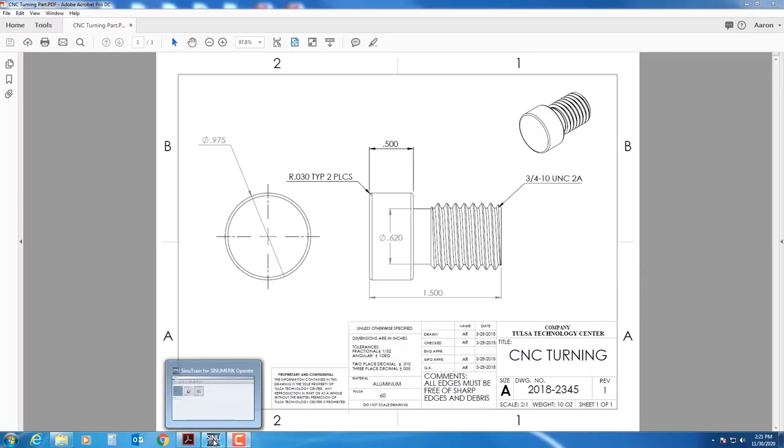So what I'm going to do is come down to my Sinutrain, which would be on your desktop once it's loaded. I will open this up. When you first open up this software, you might not have these two templates. If you do not, we will get those loaded on there for you. However, once we get to this point, we have our Tulsa Tech Fryer lathe.

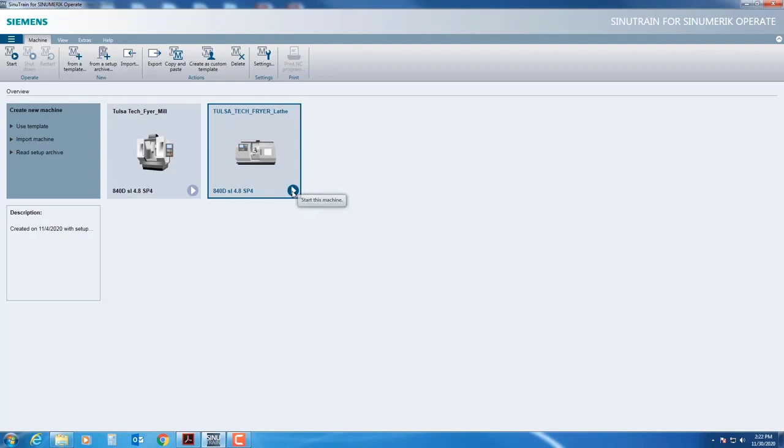We will hit the start button, and what this will do is activate that machine's simulator. Now this will power up a lot faster than it does on the machine. The first thing we're going to do, once this has come up, is get my program that I have written for that part into the machine.

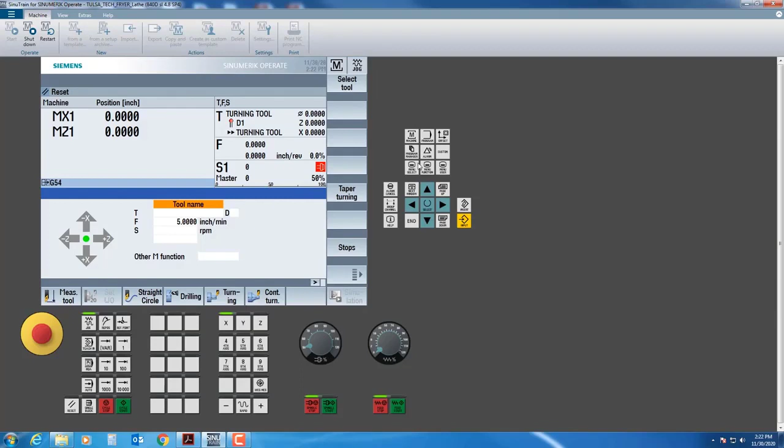So what I'm going to do is come over here to the Program Manager. If you'll notice, I have 3 sub-windows, and I'm going to put my program in the work pieces. But before I do that, I'm going to create a new folder just for my parts. So I will select New, and I'll simply type Fryer Test Programs, and then hit OK.

And after that, I'm going to hit Cancel because I don't want to create a new program. I already have a program. So I will hit Cancel.

Then what I will do is, with this highlighted, I'm going to come down to my USB. Now before I click on my USB, I need to have the program that I'm going to simulate on that USB and plugged into my computer. So I have already done that.

I will click on USB, and you'll notice this name is kind of long, so it's going to throw up an error saying that it's too long. However, I will come over here and make sure I can see the copy tab right here, make sure it's highlighted, and hit copy. I will come back over here to NC, make sure my folder is still highlighted, and I will hit paste.

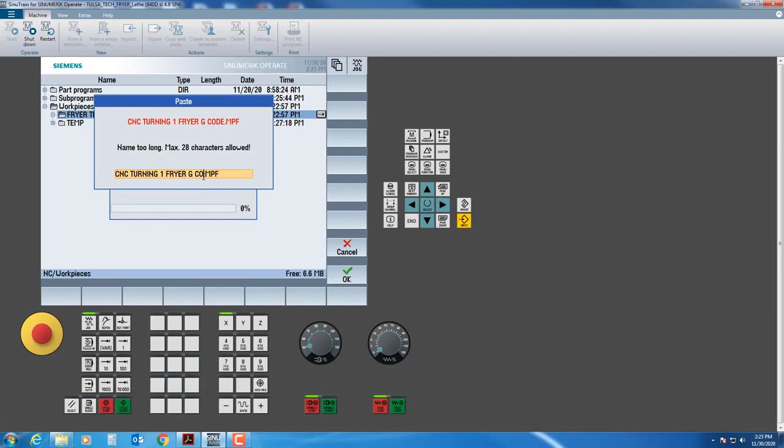Now it will give me an error, but it will allow me to change it. It just left off the D and the E, and I'm perfectly fine with that. So I'm just going to hit OK, and you'll notice that it came in just fine.

Now there's 2 ways we can do things. You'll hear me hitting the keyboard strokes a lot, but I'm going to try and do as much as I can on the screen. So with this highlighted, I'm going to click Open.

Now if you'll notice, I have a G291 that turns on my Fanuc. So I only have 2 things I have to do: I have to build my material for the simulator, and I have to build my 3 tools. Good news is it's not going to take very long at all.

So what I'm going to do is, with the caps lock on, type out the word workpiece. You also have to put an open and closed parentheses or it will not work. I will hit arrow down, then arrow back up, and then hit the right arrow to arrow over. By doing that, it actually registers as a workpiece. So if your workpiece was a pipe, block, corner, whatever it is, you could set it up for that.

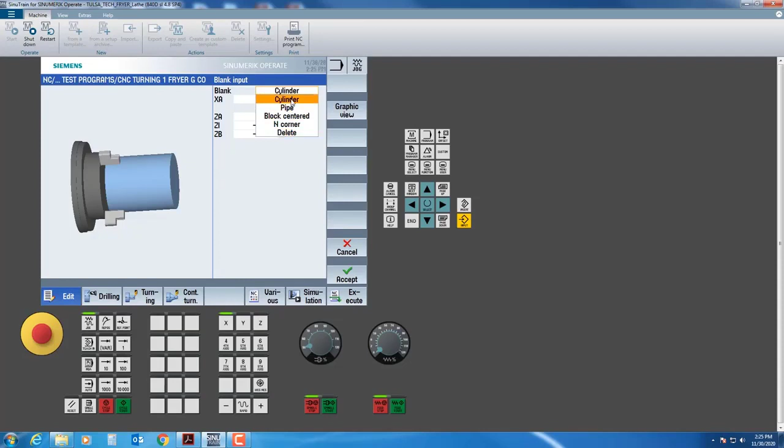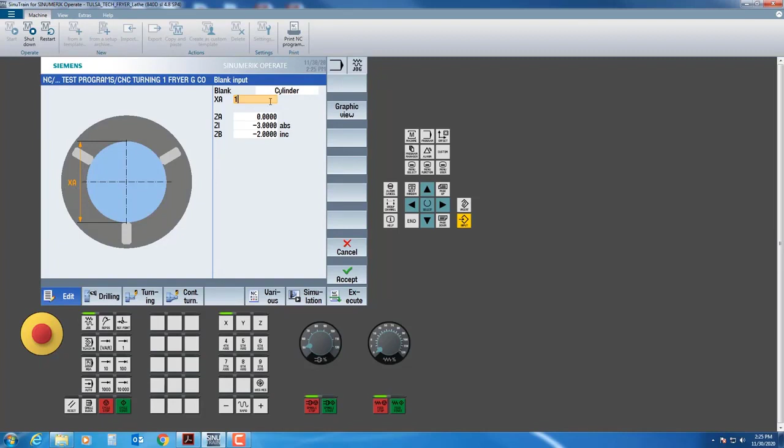What we're going to be using is a cylinder, and we are using a 1-inch bar, so it says 1-inch diameter. That's already in there. If it wasn't, I would just type in 1.0 and hit enter. Z0 is the face of my part, that's how I programmed it, so I'll hit enter. I can put whatever length I want to on here.

I just put it to be a little bit longer than what is sticking out of the chuck. Now in my program it did say to stick the part out 2 inches. This is a good visual for you when you start running your program, so you can see if you're going to run into your chuck jaws. So I made that 1 inch longer than what it's sticking out.

And remember, you want to put it in as a negative. If for some reason I put this in as a positive, it might not work. Okay, so now I've got some red numbers. If it comes up red, you just didn't hit it in there as a negative.

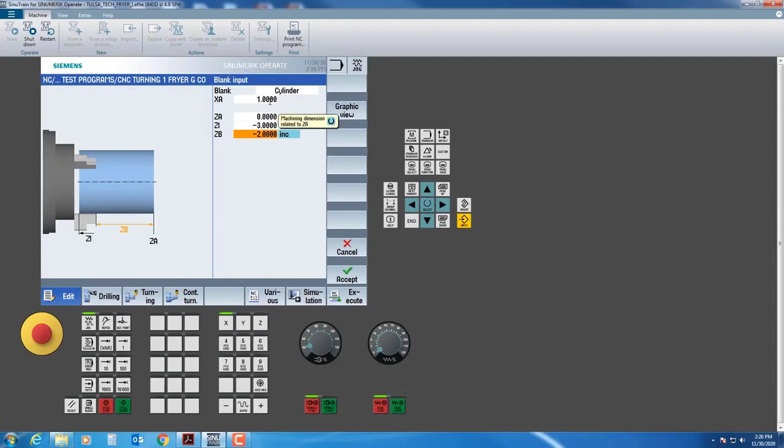So I'll hit negative 3.0, negative 2.0. All right, that will work correctly. Once I have got this done, I will hit accept. And if you'll notice, it went through and saved all my information.

The next thing I'm going to do is build my tools. Now we want to be very careful when we build these tools because this is where the simulator gets really picky. So I will go to my Offsets tab, and when the simulator pops up, it's going to have a probe. It's going to say turning tool.

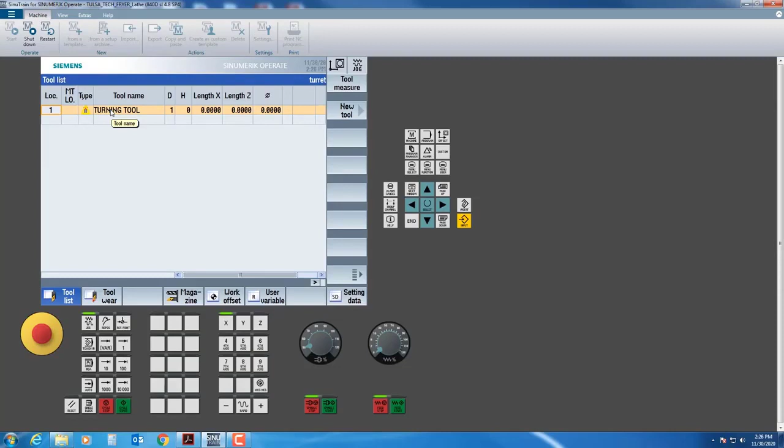I'm not able to get rid of this tool for some reason, however, we're going to edit the tool. So the first thing I'm going to do is go to Type, and click on the tool. I'm going to change it to a roughing tool. It can be a finishing tool as long as it's a turning tool. I'm going to go roughing tool, and click the very first one, position number 3.

I will hit OK. Now the tool name has to match what's in my program, okay, so you'll notice it's going to match, but it's not going to be perfect. I'll point that out here in a second. So I'm going to click in the window. Let's change the name to 101.

Now in my program, it's 0101. That has to do with how the machine calls up the tool in the turret. However, over here, I'm just going to go tool 101. A little confusing, but that's how the simulator likes it.

Now I'm going to come over here to my X length. All I'm going to do is move this tool away from the home position. If you leave it at 0, it will alarm out saying that it has over-traveled. So I'm going to go -3 inches, enter, -3 inches, enter.

However, I want it to be to the left because I am moving towards the spindle. Angle is going to be 95 degrees, that helps put it on the correct angle. 80 is going to be my insert angle. Okay, if it was a DNMG, it would obviously be a 55.

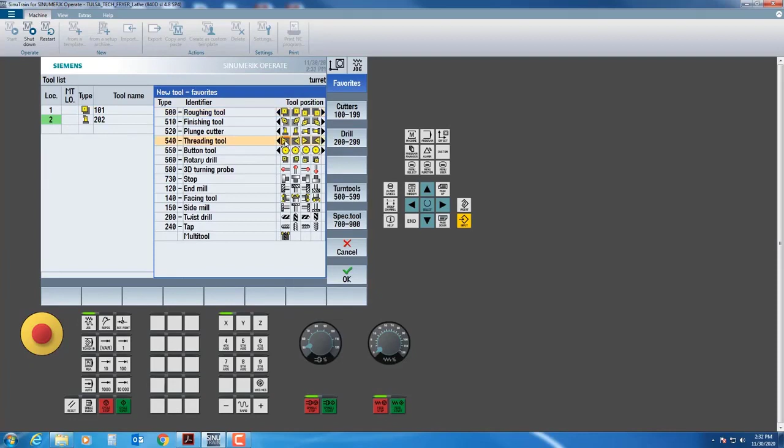So we're almost done. Tool number 3, we've got our threading tool. We're just going with a standard threader, that's the way we want to go. It's going to be tool 303. Enter. We'll do the same thing, minus 3 inches, enter. Now on here, I also put a 1/1000th radius on there. It really does help with the simulation, and it helps prevent errors, which is the reason why I do it.

Now these areas are grayed out, I can't put anything there. Now notice here, I'm going to show you something. We're going to put this at 0.4, and we're going to notice something in our graphics, and I'll show you why this is critical whenever you're doing certain tools.

So last thing, we need to put it into the turret, or let the machine know that we have put it into the turret. We'll simply go to load, location number 3, and hit OK. So that's great, all of our tools have been built. I'm going to go into the Program Manager, and then I'm going to open it.

And then what we want to do is simulate. Now it's going to simulate pretty quickly, and I'm going to show you how to slow that down. So we'll hit simulate, and it's actually going to go through and show you the real graphics of the part running. This is very helpful because these are the actual tools that you will be using, and this is simulating your code. Now notice how that got dark right there.

This is light, and that's dark right here on the top of my threads. So what happened was the cutting edge that goes in the groove was cutting, but so was the side of my insert. That's not good, because now the outside diameter of my threads is incorrect. That's what's good about this simulation, is it will actually show you what's being cut.

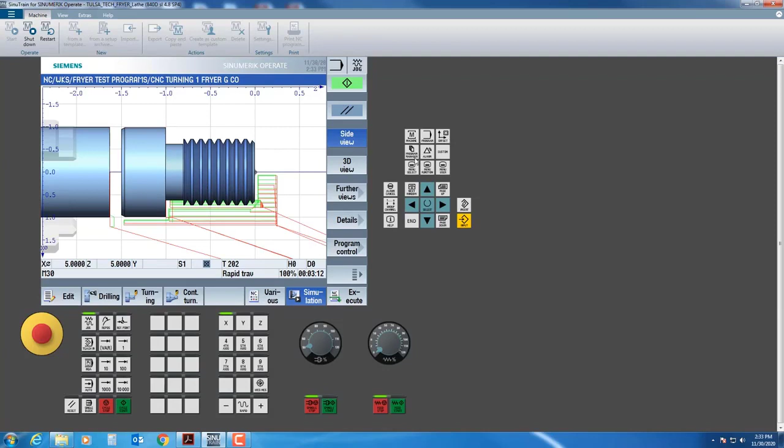All right, so let's go back to our offsets, and we're going to change this to 0.7. I'm just making it bigger is all I'm doing. What that's going to do is my triangle is going to be a lot longer, and that way the groove is going to be able to cut deeper.

We'll go to Program Manager, hit open, and we'll simulate again. Again, it's going to go pretty fast, and then I'll show you how to slow it down and see what's going on. Again, notice my G code down here showing what's going on - grooving. And then this insert's really big now. It's not hitting over here, but you'll notice it does not change colors.

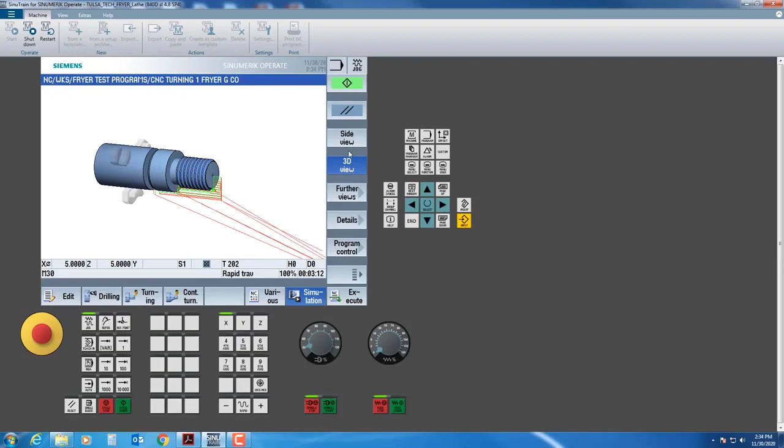Now that we've seen that has fixed that, I want to point out how to run this a little bit slower. So what we're going to do is use all these tabs over here. I can look at a 3D view - notice how my chuck jaws are right there. I'll go back to my side view.

You've got further views, you can do a face view, a half cut view, you can see if it's doing ID work, you can do 2 windows. There's a lot of things you can do here. But what we're going to do is go back to our original view. I'll hit back, go into my side view, and then I want to go into my details for zooming in and zooming out.

And if you're zoomed in too far, you can click auto zoom. So I'm going to hit back. Now program control is going to help you out a lot. You can single block your program by activating it, and if you hit back, you'll notice that this says single block. You just sit there and click this single block all the way through your program.

So I'll go back to program control. I'll turn that off, but I do want to watch it run slower. Before I hit simulate again, notice it's changing the percentage on how fast it's running. So we're going to take it down to about 30%, and then we can slow it down all the way to 1%.

So what we'll do is hit back. To re-simulate something, I'll simply click simulate and click it again. This time it's going to run a lot slower, and that's good because we can see every little line.

Or if we wanted to stop it right in the middle to see what line we're on, we can do that as well. Notice in the groove right here, it has my 32 thousandths radius. So we'll hit play again.

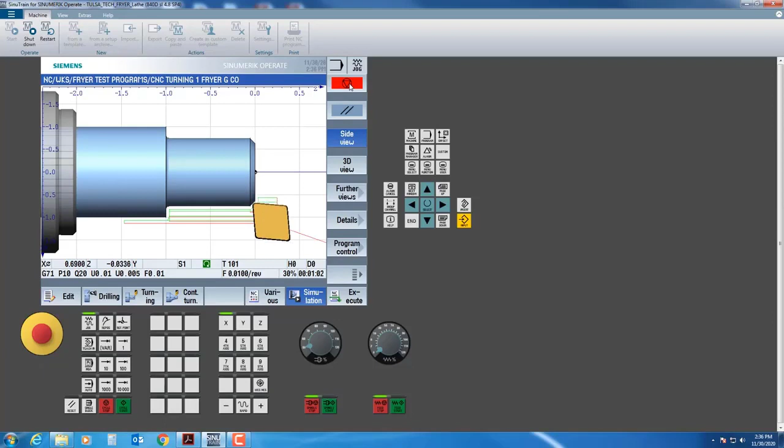It's going to come in here and start cutting my part, then do its final pass, cut back here, and I'm going to pause it because I want my grooving tool. I want to single block this grooving tool to make sure it's doing what it's supposed to do. So it's going to come over here, do a peck, and like I said, this is full control on this, and once it's done, it's going to move away.

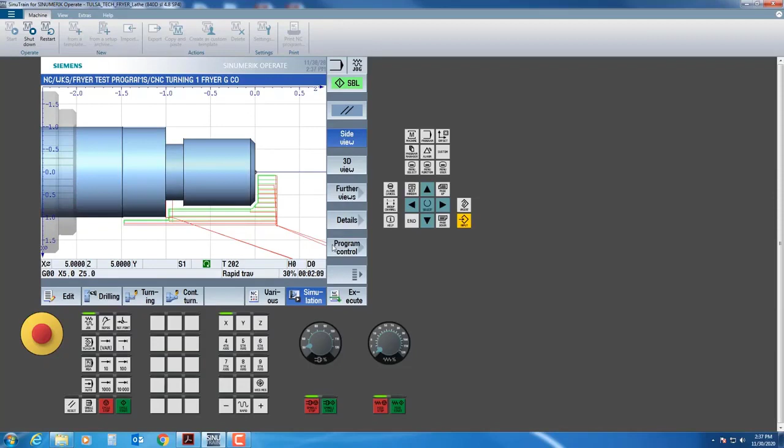We'll turn off single block, and go ahead and hit play again. So what I'm going to do is slow it down just a little bit more, and then I want to stop it right there.

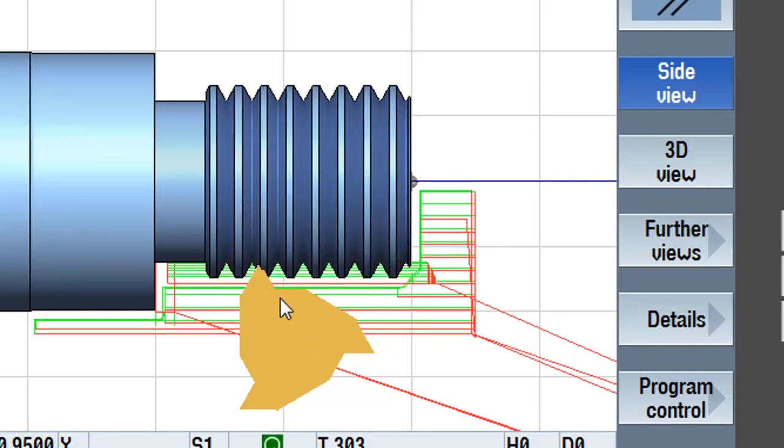Notice, before, when this was cutting right here, this is what was actually rubbing on the top of my threads, that face of that insert. So obviously, if you don't have this threading tool in your machine, you don't have to worry about it. There are ways you can custom make threading tools, but for right now I'm using a standard threading tool. So let's let this finish.

However, if you go to X0, this part will fall off, even in the simulation it will disappear. So to prevent that, I simply changed my code to stay 1/1000ths off the part. We'll take single block off, and it will simply move back, and our part is done.

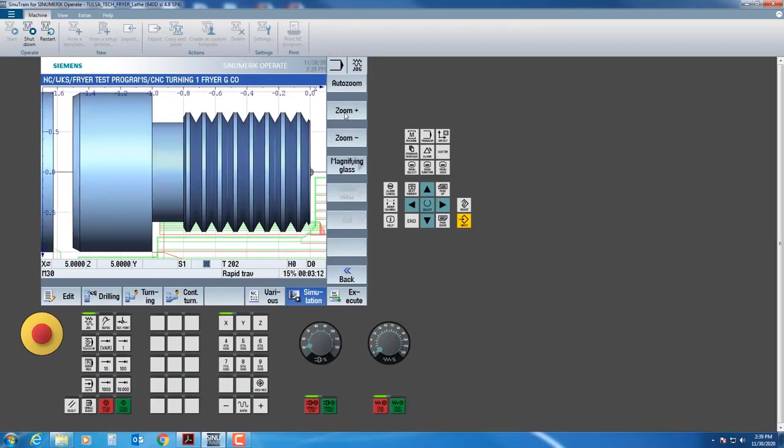You'll notice my spindle stopped, and I can see everything in here. Now I can use, like I said, let's go into my details and zoom up. I usually like to use my arrows for this so you can see all your parts. So if you want to see the top of those threads, I can see everything in here.

If you also notice, I can measure certain things in here because all this is to scale. So if I come up to the top of this thread right here, you'll see that I can actually measure. This is 250 thousandths, that's 300, so 260, 70, 80, 90. Well, that doesn't really help us that much. Maybe if we were checking our actual part, let's look at that real fast.

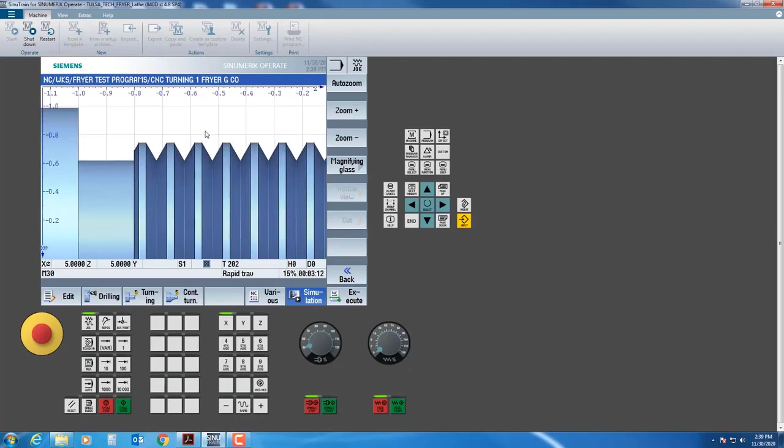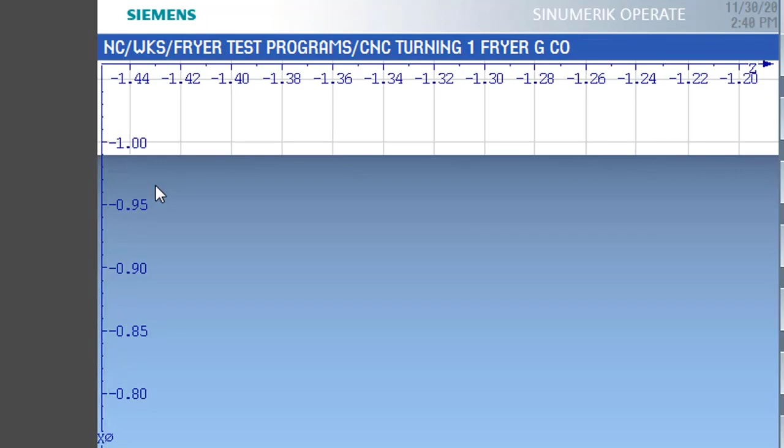Because our part's supposed to be 970 thousandths, and after I show you guys this, that'll be pretty much it. If you look right here, this gray line is at 1 inch, that's 950. Let's move it over a little bit and see where it hits. Oh, I'm sorry, it's supposed to be 990 thousandths. Notice this is 950, 960, 70, 80, 90. So at 990, you'll see that it's right on line. Those are cool ways we can check our part in our simulation before we actually run it.

So with that said, I'll go to auto zoom, shows my part, and like I said, from here everything stays set up. So this is how you can load programs to check your parts in the simulator using Fanuc program. Very helpful.

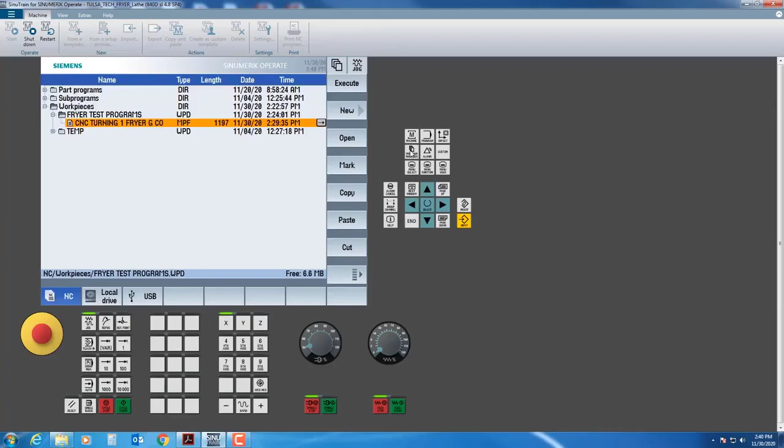Make sure you pay close attention, and you can actually use this. You can take a screenshot of this to see how to format this for your turning using a 2-line canned cycle, a grooving using a 2-line canned cycle, and then I've got my threading using a 2-line canned cycle.